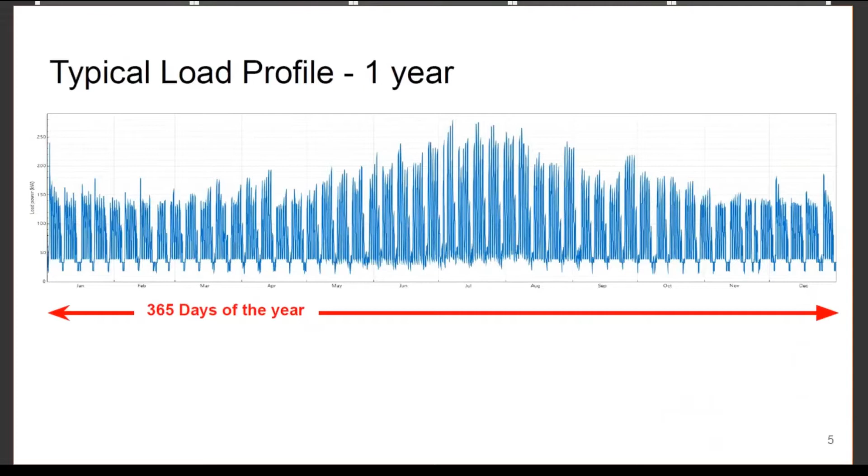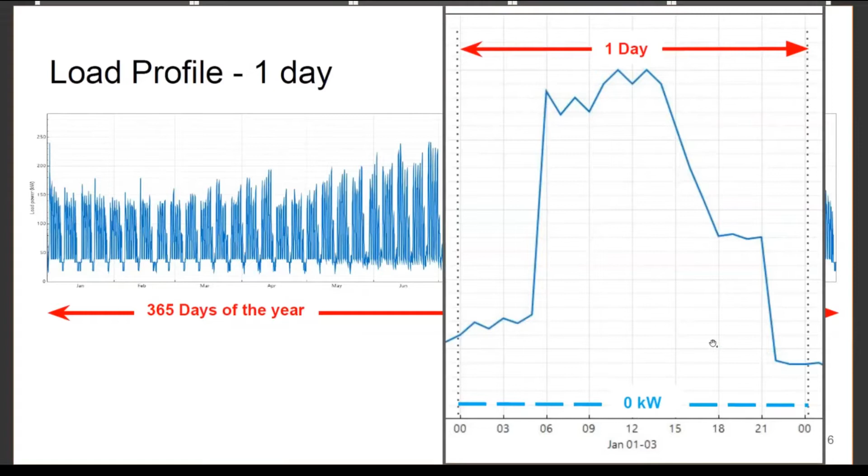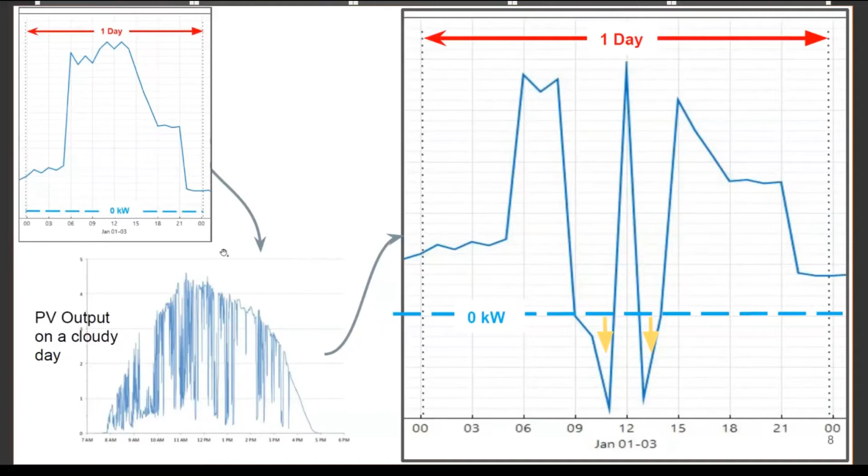So a typical net zero building could put quite a load onto the grid, and we need to understand a bit more about this. If we look at energy consumption over a period of a week, we start to understand that net zero energy buildings may not scale. And by this I mean, if you had a whole neighborhood of net zero buildings, what would the impact be?

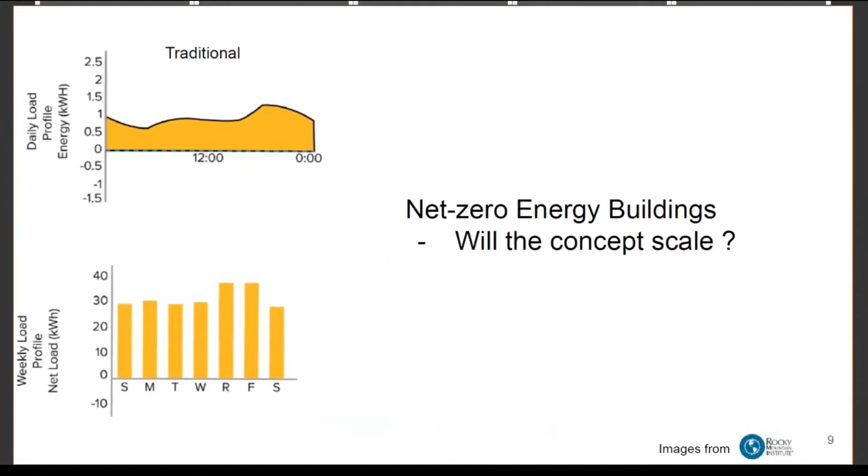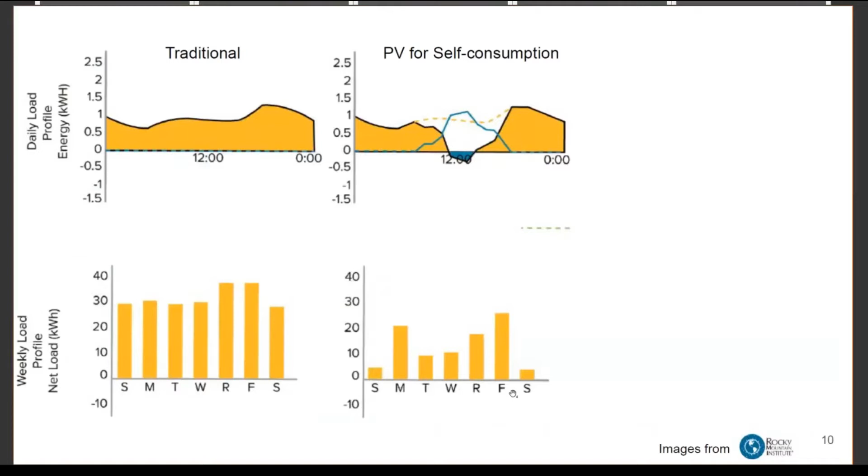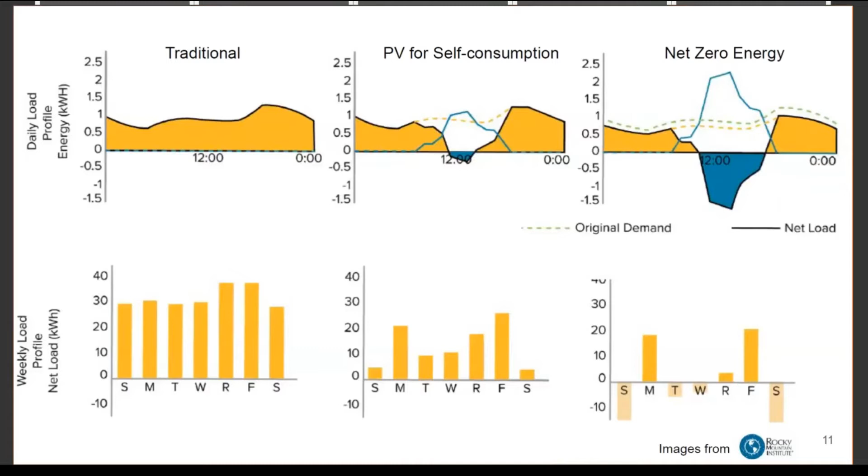What this really means is we certainly do need to understand whether the grid itself can make use of this energy. So the first thing we need to understand is, whilst we should be looking to ensure that buildings can seek beneficial coexistence with the grid, the net zero approach is a theoretical approach maybe, and it assumes that in an ideal world you've got a magical grid which will have infinite capacity and also be run by a benevolent charity that is willing to take your meager amounts of self-generated energy at a moment's notice, and of course with fabulous reward, because that's the reason why you're going to push energy back into the grid. Now, of course, in the real world, it's a very different picture.

A neighborhood full of so-called green buildings covered in rooftop photovoltaics may produce excess energy, especially in the middle of the day, and may find that the grid is unwilling to pay for this amount of energy. So a lot of concern revolves around whether net zero buildings can scale. It's all very well having one or two on your feeder, but what happens if every building on your feeder is now trying to play the net zero game?

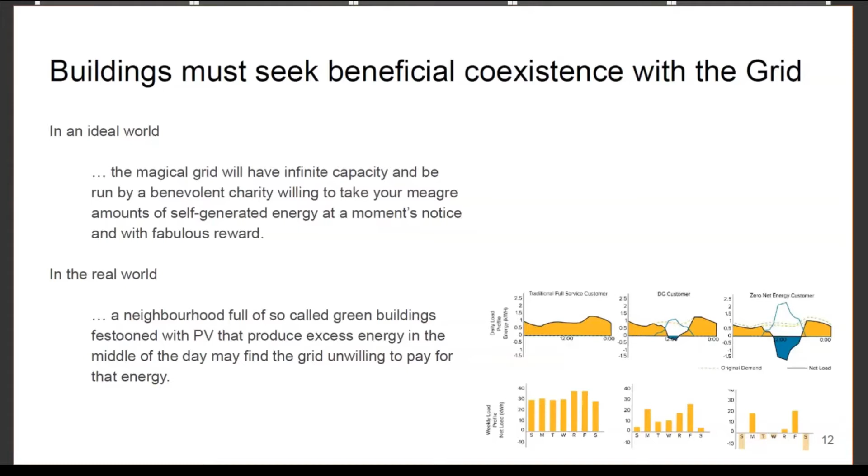So I think at this point, a lot of researchers around the world started looking at a different way of doing things. And I must admit that one of the better articles, believe it or not, that came out about these issues is a paper published by ASHRAE, I think in around 2018, called The New Energy Future. It was put together by Sheila Hayter, who was the ASHRAE president at the time, and Hugh Crowther, ASHRAE member, and working together with the American Institute of Architects and other players in the space, they put together what has really become a very important position paper about where our new energy future is going.

And the paper notes in particular that the grid has buildings as probably their most important customer. And these buildings are more than likely to become active grid partners. Now, you've heard from Rena and the India Smart Grid Forum that we're heading towards a world where the grid will be smart.

It will have a number of intelligent capabilities, the ability to communicate, and a number of benefits flow from that. So how do the buildings integrate? What this paper did focus on is the need for change in the way we design and operate buildings, and especially on the need for net zero energy buildings to evolve.

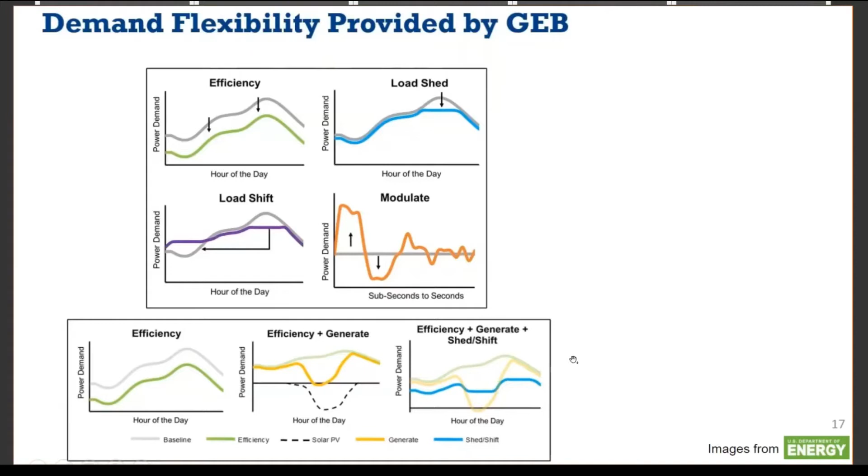Now, the key characteristics of a GEB, as we've said, it starts with efficiency. You're looking at persistent low energy use. This has got to be something that continues. Measurement and verification play a big part. The need for proper commissioning of these buildings to reduce the energy usage, make them more efficient, is important.

Next up is a connection, a two-way communication with the grid itself via a number of technologies. You're probably well aware that we're moving into a world of 5G, of internet connectivity, Internet of Things, IoT. The benefit of being connected, of course, is your building can start to understand how tariffs are changing, because we're also moving into a world where we have dynamic pricing. The kilowatt hour is dead. The whole idea of a fixed kilowatt hour charge is just about over.

In future, the price of energy will depend on the supply. When the wind blows and the sun shines, a lot of renewables will come onto the grid, and that'll be available at a much cheaper price. So dynamic pricing means that your building has to be in contact with the grid to understand these issues. Looking ahead, the look-ahead market, if you know the wind's going to blow tomorrow and the sun is going to shine, the price of energy is going to be a lot lower, and you can start making plans ahead of time, all because you're connected to the grid and you're aware of these things.

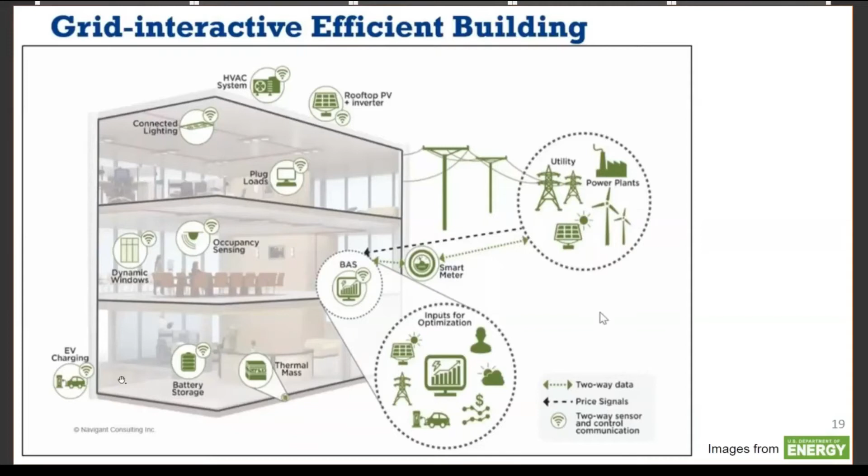So there's a number of names for this strange animal, the GEB: grid integrated, grid interactive, energy flexibility. But what is very clear is that these buildings are becoming profitable, and they can be seen as both a power station because they generate their own energy, and believe it or not, as a petrol station, or a gas station, as you call it in America. The idea that buildings are able to become the natural home of electric vehicles is something that I don't think we quite appreciate.

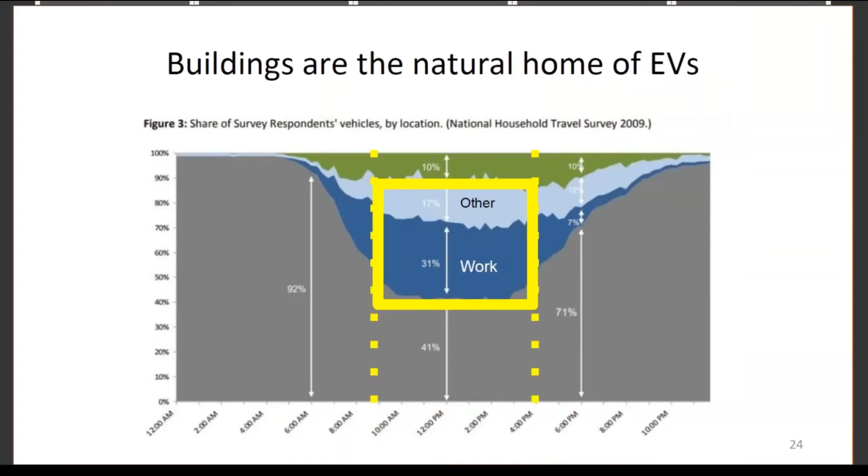If we looked at, and I chose an Indian city which has 3.5 million private vehicles, according to the stats. As you know, we look up everything on Google. And if 50% of those private cars are connected to buildings during the day, we see some incredible numbers. So let's assume that of those 50% of cars, about 1.4 million of them are small urban vehicles with a battery of about 30 kilowatt hours. Think of a Nissan Leaf, okay? Then about 350,000 of them are larger vehicles, such as a Tesla Model S or even the Model 3, a fairly large battery of 80 kilowatt hours.

When we sum all of that together, we realize that there's many megawatt hours of energy available. If those EVs, electric vehicles, are connected into buildings, a lot of that capacity is available to the building as a mobile energy storage unit that comes to your building. Also, it represents a market. Those vehicles need energy, and the building may well be able to sell them energy, probably at a profit.

The other thing to consider is that these large batteries in electric vehicles have the ability to provide instantaneous power. So I've made the assumption that the instantaneous power available from a 30 kilowatt hour Nissan Leaf battery is about 60 kilowatts. It's actually quite a bit higher, right? And then for the 80 kilowatt hour battery in, say, a Model S, the smaller Model S's, we could maybe draw 160 kilowatts from that battery.

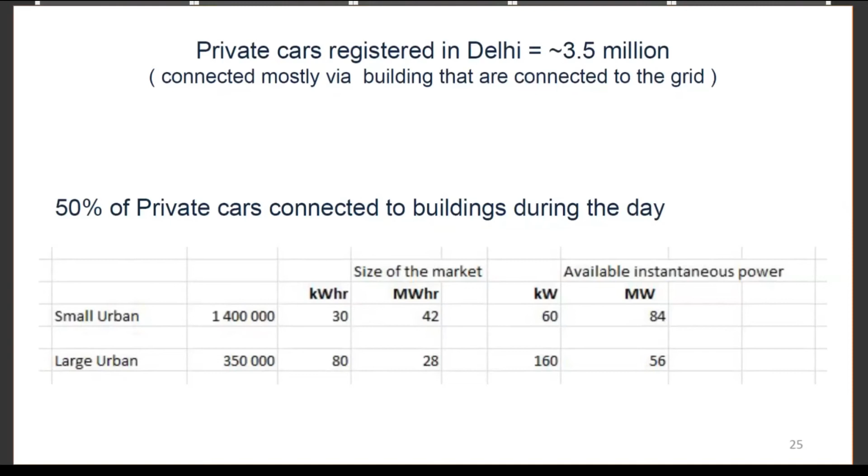If you look at the available instantaneous power from these close to 2 million vehicles in a large city that are connected into buildings, you'll see that there's a massive capacity available to buildings to help flatten the curve. And there's various business models and various games that you can start working on how the synergy between electric vehicles and buildings plays out. A lot of business models, and I think there's a lot of profit there. We keep hearing of the blockchain approaches and the various ways that you can buy and sell energy. Okay, so let's put that aside.

Let's move on. The vehicle to building to grid is a growing industry, as we've said. If you accept that buildings can generate their own energy and also interact with the grid, then you need to start looking for a framework for a new energy business model. And believe it or not, the framework is going to come probably from the work that ASHRAE has done. The facilities smart grid information model is probably going to be central to the business models of modern buildings. And believe it or not, it all started with ASHRAE.

This facility smart grid information model was originally ASHRAE 201 in 2016 and has now become an ISO model. So ASHRAE, working with the smart grids people, the IEC is like the ISO except for the electrical market, have put together this bridge between the traditional utilities, the electrical providers, and the new electricity prosumer, in other words, the building itself. This particular information model is critical, and let's have a quick look at it here. I'd like to suggest that it's the most important standard that you've never heard of, and I'll explain why.

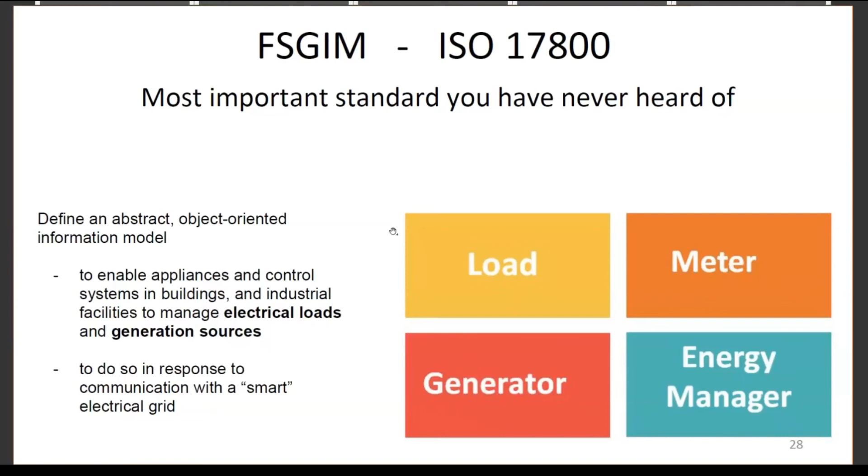Now, why did I say it's the most important standard? It's because this particular component, the meter module, quite possibly will have a massive amount of money flowing through it. It's the interface between the building and the grid. And as we know, roughly 40% of all electrical energy in the world is used by buildings. So that orange block, the meter or the sub-meter, will handle the information flow about energy to the value of trillions of rupees, dollars, or euros. So that's got to be an important part of any business case.

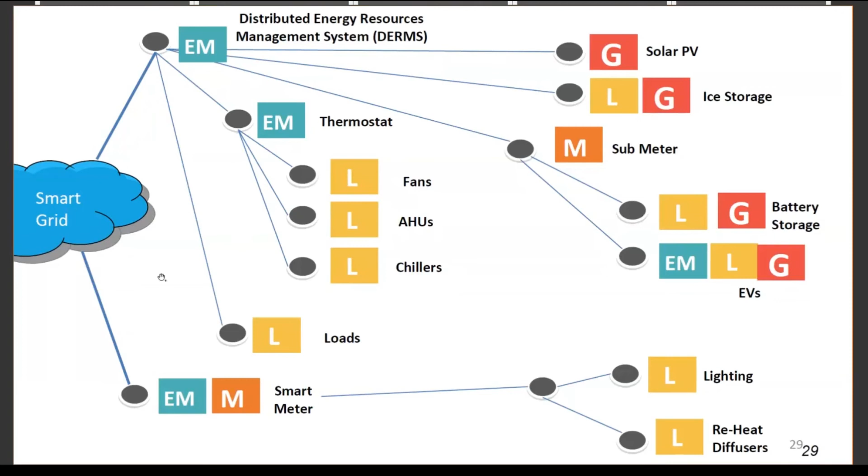What you see over here is you've got your energy management modules, such as a thermostat, and it's controlling loads such as fans, chillers, air handling units. In other cases, you've got the energy management controlling the charging of electric vehicles, of storage, and in conjunction with smart meters, your lighting loads, all feeding the information backwards and forwards to the smart grid, negotiating better pricing on energy, doing the load shifting, the shaping. And the quickest way, I think, to look at it is to look at the sets of practical use cases spelt out by the facility smart grid information models.

Okay, so I'm just going to run you through one of the many cases. I think, if I remember correctly, there's about 50 of them and growing. And the use case really gives you a good feel for what exactly this model is about. Right, so the first one, of course, is to manage demand to minimize costs. Your demand costs are becoming increasingly important, and if you can shift, shape, and shed loads, you can control your demand charges, right?

The next one up, use case number 4, for example, is about balancing the power purchases between the utility and the on-site generation. So when do you really want to buy energy and when do you want to sell? Clearly, on the days the smart grid tells you that there's excess energy and the prices are low, you may well want to buy a good deal of energy, charge up your batteries, charge up your ice storage, your chilled water storage.

Okay. Use case number 8, always a need to measure your plug loads, calculate costs, consumptions. And of course, the big one, if you're starting to look at green buildings, is understanding your emissions, your CO2, your energy costs, and compare that against benchmarking, which is what LEED does. And we know that ASHRAE has a number of benchmarking standards.